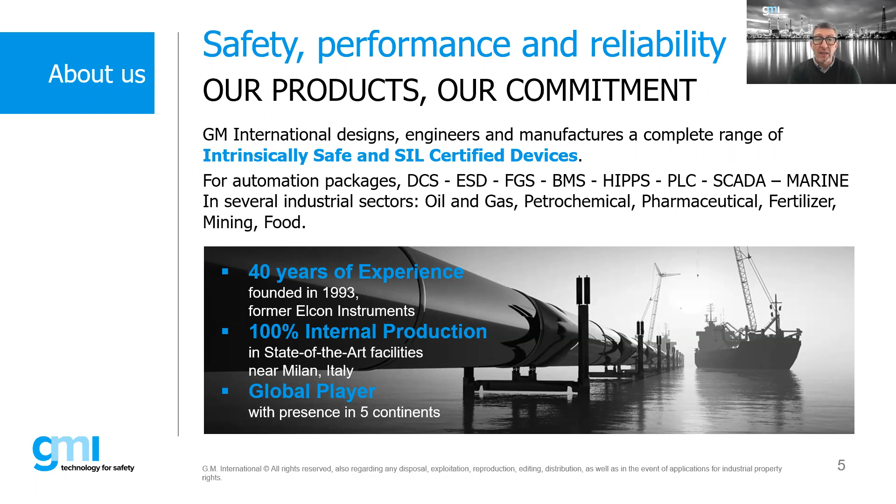We have 40 plus years of experience, and we are very proud to be 100% internally manufacturing our product in our state-of-the-art facility near Milan, Italy. We have a global presence around the globe, around the continent.

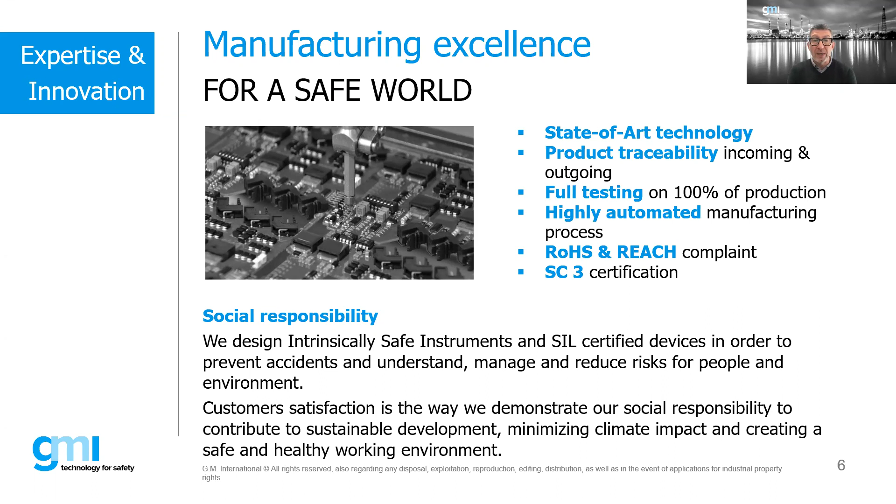Because we make safety products, we take special care in manufacturing them. We use state-of-the-art technology, 100% product traceability and 100% testing. We have a fully automated manufacturing process. We are RoHS REACH compliant, and we are also certified functional safety management up to SC3. So our products carry an SC3 certification, meaning not only the product but the process, manufacturing, and design engineering process are also certified to be compliant up to SC3 level. We do this because we care for our environment, our people, the world we live in. A safer world is a better world for all of us.

Bob, you did not download the latest presentation. I didn't.

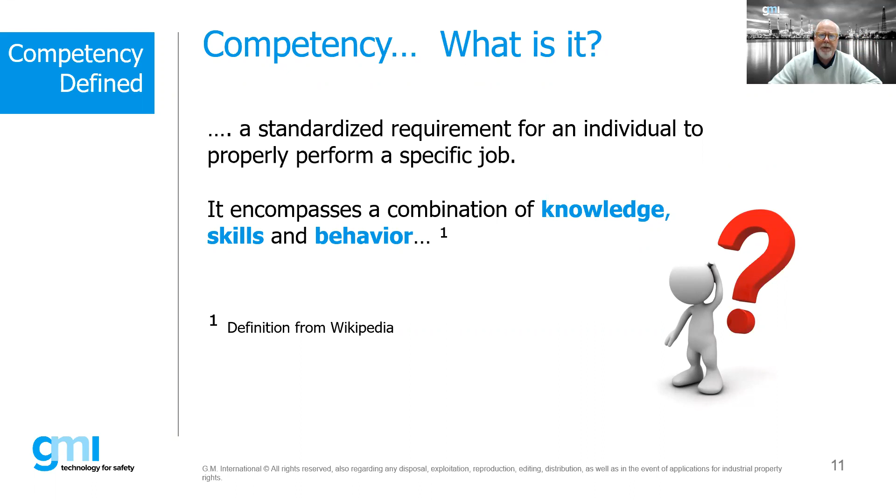Again, competency doesn't mean that you necessarily have a lot of experience, right? That's important to understand. There's a lot of people out there that have been doing things, but they've been doing it wrong for a long period of time. One of my colleagues worked in the offshore market for about 15 years as an electrical installation technician. He went and did a competency program after 15 years of doing installations offshore, and realized that he had been doing a lot of things completely wrong. Even though he thought he was doing it right, and had a lot of experience, he realized very quickly that he didn't know what he was actually doing. So it's important to understand competency is not just experience.

Understanding that competency applies to different roles and responsibilities, just because you're competent in one area doesn't necessarily mean you're competent in another. Look at it like an airline pilot - a pilot that knows how to fly a Cessna doesn't necessarily know how to fly an Airbus, or even within the Airbus family, you have to understand how to fly the different jets. So you have to demonstrate your capability, and then you finally must be assessed in the performance. This is where somebody sits over you and looks at you and says yes, you know what you're doing, or no, you need more work. So competency is basically that knowledge, skills, performance, and behavior.

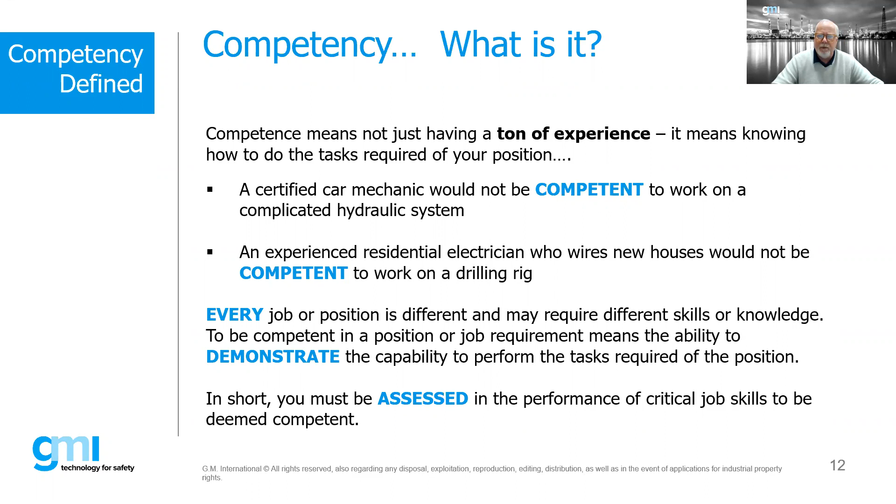So where did competency really come to a head with regards to the EX world? If we go back and look at the history of EX installations, it was really developed - the first competency programs came out of the Piper Alpha explosion that happened in the North Sea in 1988.

Piper Alpha - it was not an electrical issue that actually caused all the problems, but there were a lot of lockout tagout issues, responsibility of management issues, and a lot of things that took place that ultimately caused the disaster. But this was a real wake-up call, not just for the offshore oil industry, but for the industry as a whole. Piper Alpha constituted about 10% of the total North Sea production of oil and gas, and it was a traumatic loss of life - 167 people were killed.

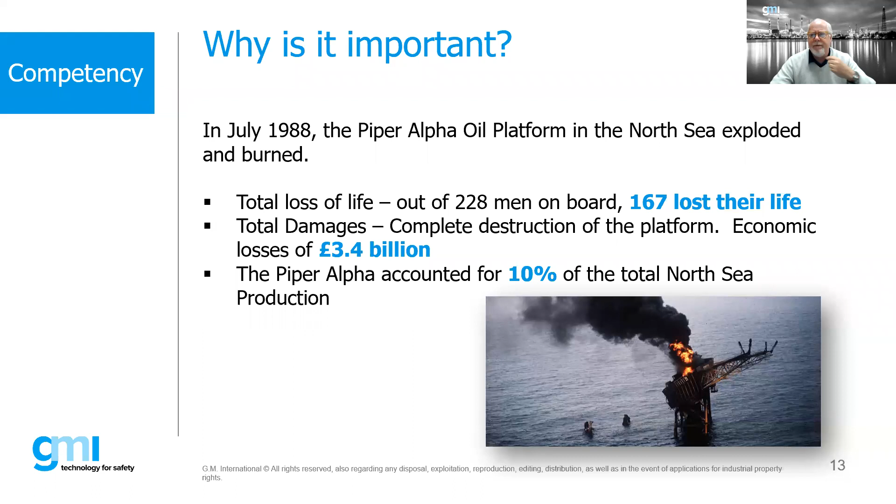So what happened after Piper Alpha? There was an investigation called the Cullen Report, which took about two years to publish, and it finally came out. In that report there were 106 recommendations, and every single one of those recommendations was implemented. One of the key things was that the employer should be responsible for the competency of its employees. This was kind of a vague mandate, if you will.

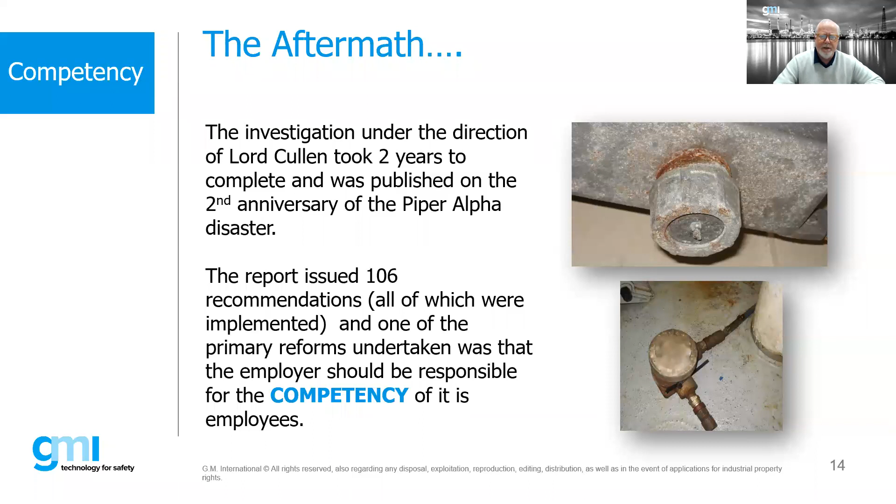But a lot of the owner operators and regulators started looking at it and said, well, how can we determine the competency of employees, specifically for the electrical and instrumentation folks? What really also came out of it were improvements to the permit to work system and the initiation of formal safety assessments. This started to formalize a lot of the things people were taking for granted - we now really have to have systems in place to regulate and stay on top of it.

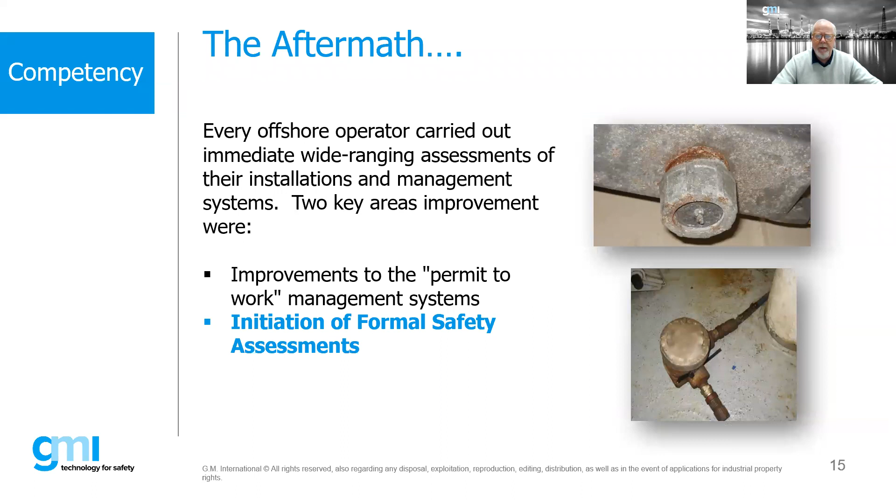So what happened really is the Cullen Report came out, and the other owner operators in the North Sea - companies like Shell, BP, BG, Esso, Chevron - they all got together, all the technical authorities from all the major oil and gas companies.

Basically, they got together and said we need to do a better job. It didn't start off as a governmental mandate, but the original programs were actually developed by the oil and gas operators themselves. They wanted an outside entity to develop a competency program they could put their people through, to make sure these individuals know what they're doing the moment they step on an offshore oil platform. So the first program developed was CompEx, introduced in 1994 at Aberdeen College.

Fast forward to today, within Europe we now have the ATEX 153 directive. Many of you are probably familiar with ATEX. The ATEX 153 directive basically puts the onus on the owner operator of the facility to make sure individuals participating in electrical and instrumentation work, in all different kinds of roles, must be competent in some way, shape, or form. This got implemented in the UK as the DSEAR regulations. So in a roundabout way, the original competency programs came from what was more of a client-specific requirement, and it became more of a regulatory requirement under the UK DSEAR regulations.

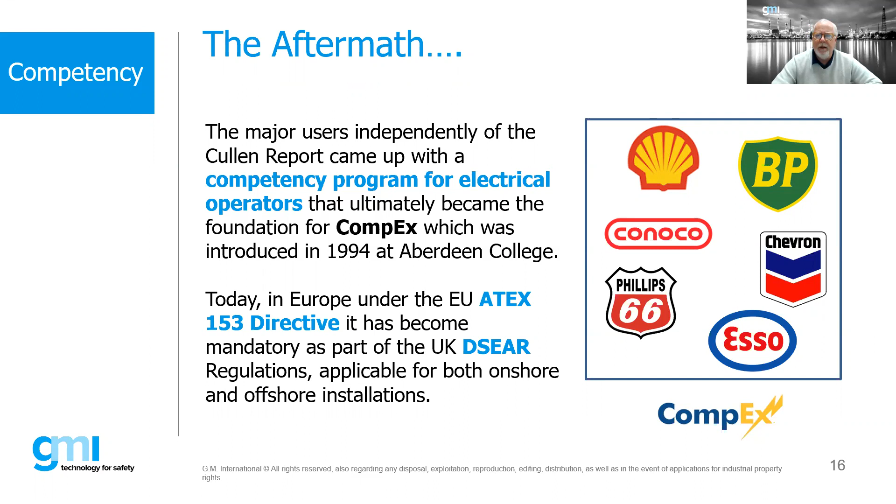Now, what standards are out there that really define competency? Where do we find the information, and how do we determine what makes an individual competent? The main installation standard that we use, and that most competency programs are based upon, is the 60079-14 standard. This is our design standard that we follow for EX designs.

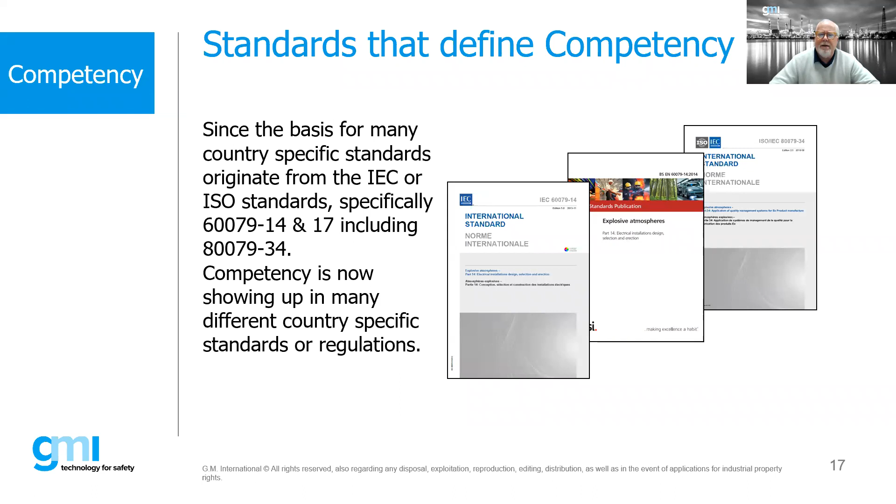There are other IEC standards out there. The 61892 standards deal specifically with offshore oil platforms, and there's a whole bunch of other IEC standards obviously. But the one we really follow with regards to competency is the 14 and the -17 standard, which is our inspection standard. And now the latest edition, 80079-34, applies to manufacturers of EX equipment. So if I'm a manufacturer of EX equipment, this second edition, published about 1.5 years ago, now requires competency for manufacturers. It's showing up in a lot of these standards, and it's important to understand why.

Just because a standard gets written doesn't necessarily mean it becomes a regulatory requirement, right? Standards are standards, and it's really up to the role of the regulators to determine how they're going to apply it. In the UK, the organization responsible for health and safety is the Health and Safety Executive. They're the guys that will come in and shut down a facility if you're doing things wrong. In the United States, we have organizations like OSHA, the US Coast Guard, BSEE, and different regulatory agencies throughout the world that, in some respects, adopt these standards and say you must comply with them.

Competency comes into effect starting at the standards, but it also comes from clients insisting on it, and now regulators are getting involved too. This actually just happened here in the United States, published in July of this year. This is the first time the US is starting to require competency. The United States has actually been a little behind the ball with regards to some of these requirements. In many other parts of the world, competency has already been in place, and the regulators have bought into this. But now finally the United States is starting to require this as well.

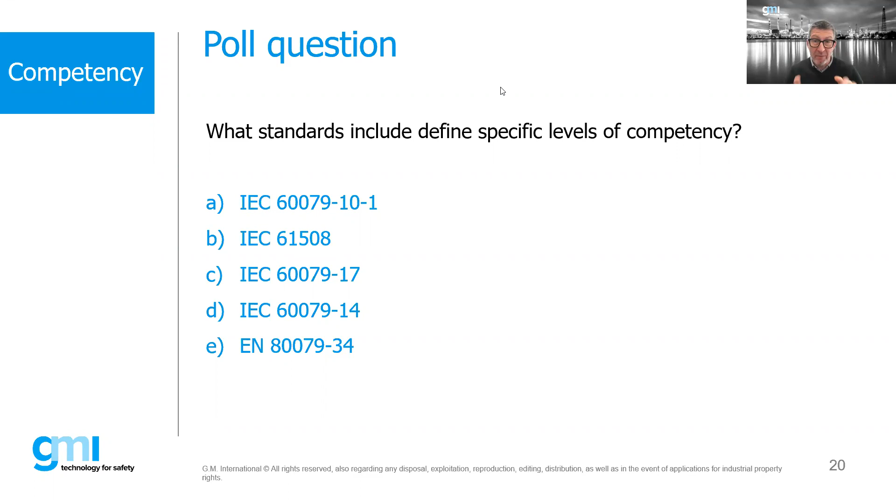We had our own version here in the United States, as everybody is aware of Piper Alpha, with the Deepwater Horizon. Obviously there wasn't quite the loss of life that we had with Piper Alpha, but we certainly had 11 people die. But if you notice, the economic impact of this was about $45 billion, and it affected BP and Transocean in a very dramatic way financially, and it affected all the fishermen, the people in the industry, the tourism industry, and everybody else. It was a horrible, horrible accident that took place.

But this was, I think, another wake-up call for the industry, and it started making people think again, what are we doing, how are we doing things? Everybody knows the story about Deepwater Horizon, so I won't go into all the details, but basically it wasn't necessarily an electrical issue that was really the key deciding factor. It had to deal with the BOP and the well and all that other good stuff.

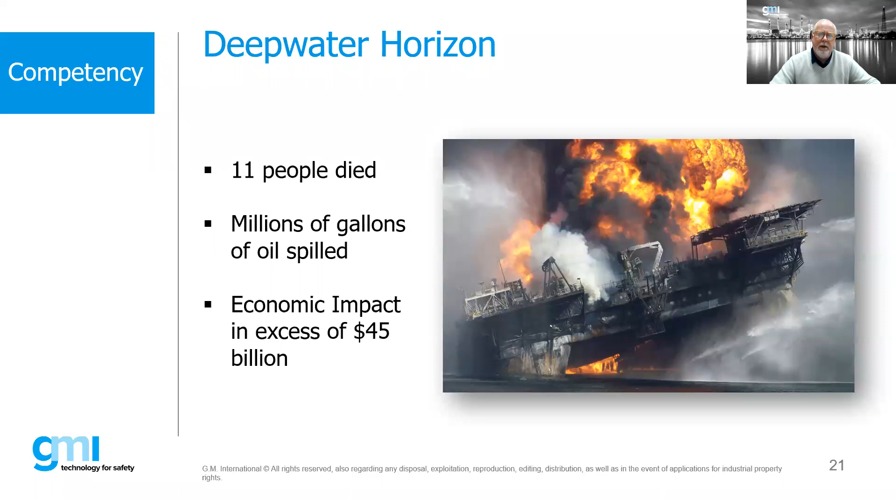But there was a report published, the United States Coast Guard BSEE report on findings on the Deepwater Horizon. One of the things that came out of this report was that some equipment on board was in bad condition and severely corroded, and some of that equipment had been left in hazardous areas. If you've seen the movie, or are familiar with Deepwater Horizon, what was the actual source of ignition? In the movie, they talked about intake of gases into the motors, the motors oversped, the lights started getting brighter, and then ultimately that was the source of ignition.

Well, that was one theory. There were other theories that actually there was a door left open for electrical equipment that should have been purged and pressurized, but was not, and that potentially could have been the source of ignition. There were also theories that the electrical equipment on the driller's floor, located in the Zone 1 area, could have caused the explosion. So nobody actually truly came up with the final determination of what caused the initial explosion. It could have been, again, many different sources.

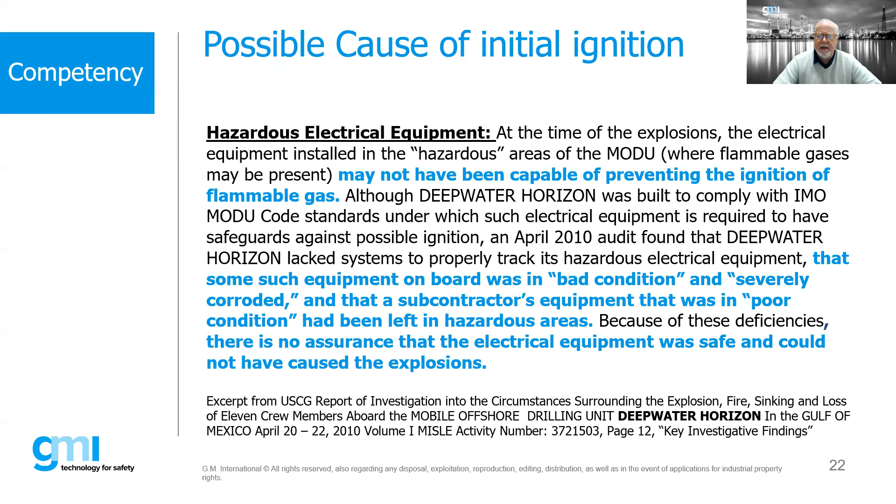But obviously that also changed the thought process with a lot of oil and gas companies, starting to realize, hey, we do not want to have this happen to us. So the important thing is the certification of a product in and of itself is not the whole picture.

So it's not just the product certification, it's the proper selection, the installation practices, and certainly maintenance is a key issue. We just can't install this equipment and let it go indefinitely without taking a look at it, making sure that it is still suitable. It's like driving your car. You don't drive it forever without changing the oil, changing the brake pads, doing all that stuff. We have to maintain this equipment.

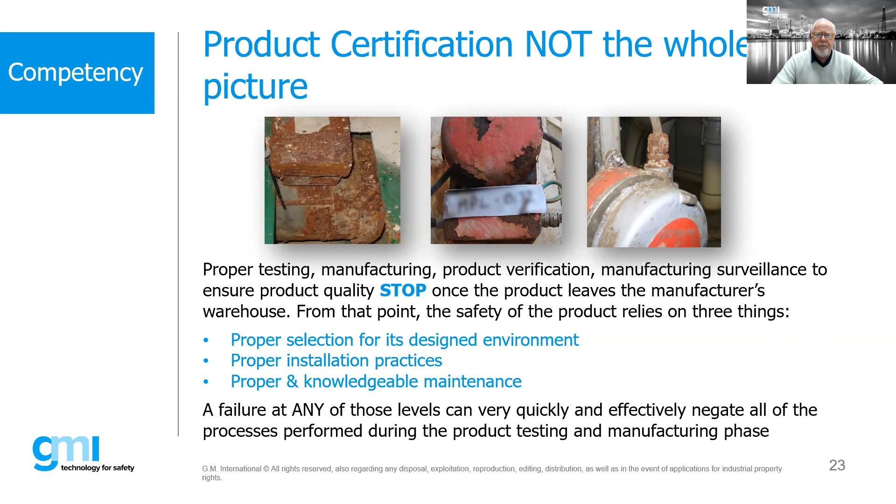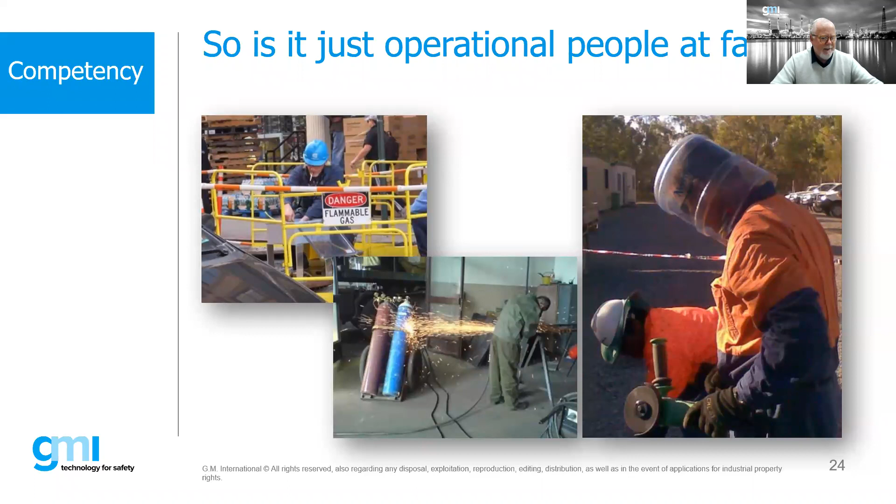So a lot of engineers, and I'm sure we have a lot of engineers paying attention here, we always think well, it's just those operational guys, right? It's not necessarily the guys in the buildings doing the design work, it's the idiots in the field, so to speak, right? Well, it's not just necessarily the operational people. It's actually kind of a combination of a lot of different roles and responsibilities.

So this was a great report that was done quite a few years ago by the HSE, and they looked at the root causes of a lot of major industrial accidents. One of the biggest areas in which the root cause came from was actually at the specification stage. Now, what does that mean? The specification could be the fact that maybe some engineer designed a product that was not suitable, or maybe the design itself, not necessarily the product, but the design itself was faulty. It could have been a lot of things.

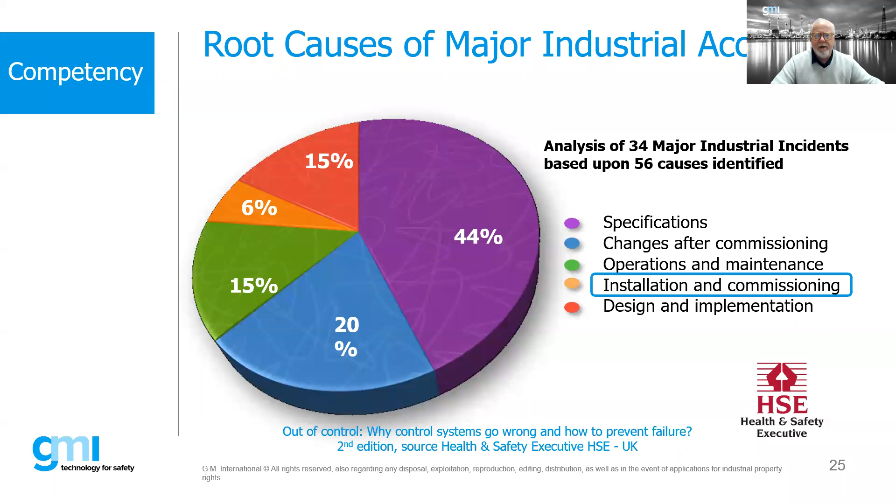And we look at it and we say, well, it's the guys that are actually maintaining it, and again that's a healthy chunk, but it's only about 15%. So a lot of things that have come about from some of this research is showing that a lot of the faults and problems we run into are actually developed at the very, very early stages. So it's important in this whole thought process that we don't just look at it from a maintenance and installation issue, but we look at it from a design standpoint as well.

So generally, last week I had an opportunity to do an inspection on a vessel that was powered by LNG. They called us in to do an inspection on this, and we finished it up. Of the 400 items that we saw installed, in their case there was about 80 issues. Now some of these, quite frankly, were not that big of an issue, but that's a pretty healthy percent. In general, when you come in and start doing inspections on EX installations, the ratio of issues you might find is anywhere from 20 to 45%. It's not uncommon to find a lot of problems.

And if we look at the example on the right-hand side with this gas detection panel, that was a panel installed in a Zone 2 area, but clearly states that it is a non-hazardous panel. So that's not necessarily an issue for the guy that was actually doing the installation. It was more of an issue that never should have been there in the first place, right? And again, lack of training, lack of competency.

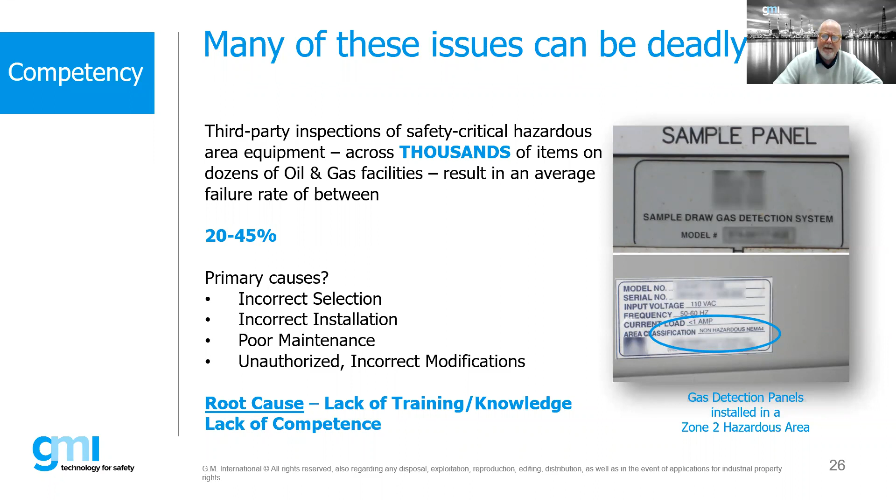We have a new question for you guys. We showed a chart moments ago showing what is the leading root cause of industrial accidents, and see if you remember that, or if you know what it is. Say ops and maintenance, or specification, installation, change after commissioning, which are called modifications, and design and implementation. They are all causes of accidents, every single one of them, but one is a leading cause, which, when I learned that, I was a little stunned. I mean, we always blame it on those guys in the field, but it's not always.

Yeah, and on the other end, you know, the pictures you show about maintenance, crazy. After 2.5 years, the motor is completely rusted and rotted. Of course, if it's an EX-D motor, it's no longer suitable. So it's obvious an accident happened.

Okay, well, let me see if anyone else is answering, or we'll land a poll. We have a good percentage of you guys answering.

Most of you said specifications. Yes, she's correct, fantastic. Specifications was the correct answer. And again, as Paulo said, it's a bunch of different things, and they're all potential causes, but specification seems to be the root cause of a lot of these industrial accidents.

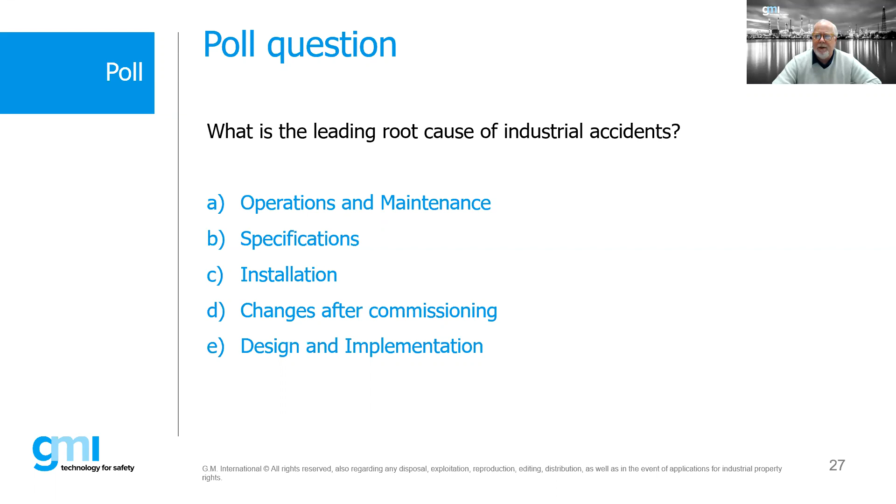So let's continue on. Now let's get into the nitty gritty. What do the standards actually say? So again, the design standard, the -14 standard, the latest version is 2013, and it's divided into 3 roles of individuals. This is all located in Annex A of the standard.

So it divides it up into knowledge and skills of a responsible person. This could be a project manager, a project engineer, or it could be an operator technician, which are the individuals actually doing the installation and maintenance. And then finally, the designers—these are the folks that are actually selecting products, designing systems, and all that.

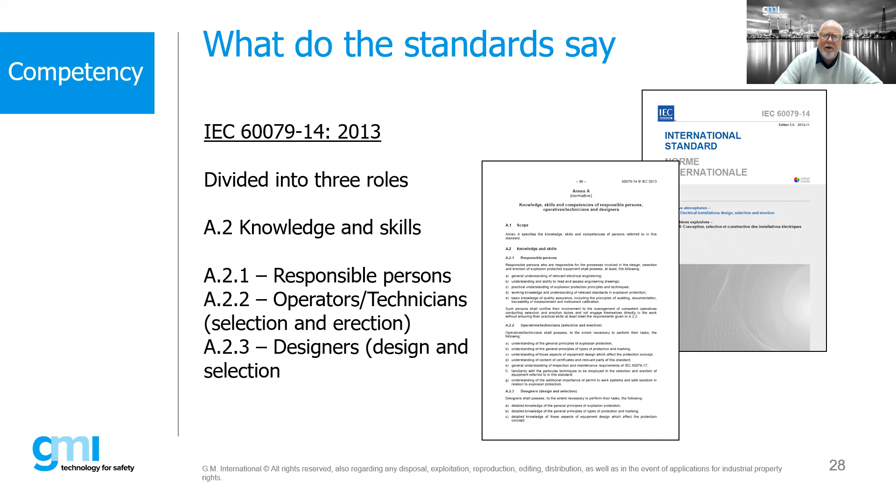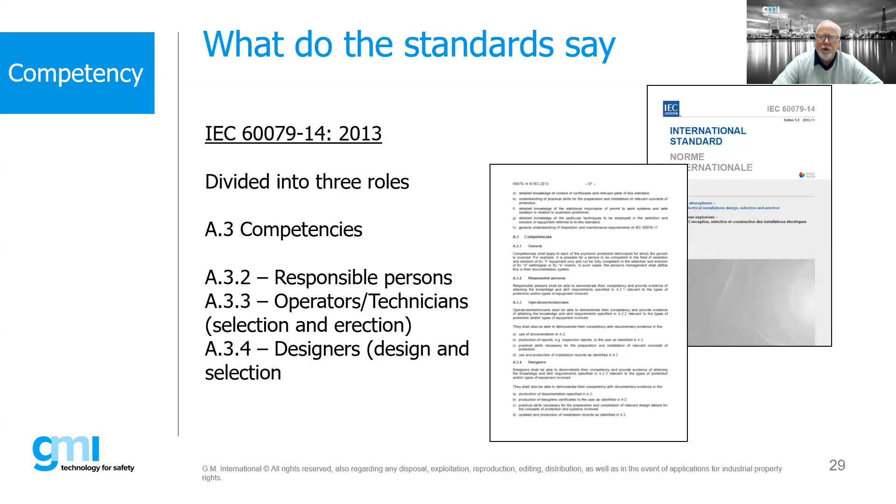So within the standard, it starts defining the competency for those 3 individuals or groups of individuals, and it starts to tell you specific information as to what that individual shall understand, should know.

So the final thing, it states about an assessment, and the competency shall be verified and attributed at intervals relevant to national regulations, on the basis of sufficient evidence that the person has the skill. Can they act competently—there's our behavior—and do they have the relevant knowledge and understanding? So just because you have that knowledge and understanding, the standard is actually saying you shall be assessed. Now, here's the important thing to understand about assessments.

Assessment doesn't necessarily mean, and the standard doesn't say, that it has to be done by a third party. A lot of organizations use outside training and assessment programs like CompEx or the IECEx COPC program, which we'll talk about, but it doesn't necessarily say it must be done that fashion. It can be done internally, but everybody going through it should at least go through this, and a new employee, just like orientation for doing your job, should be trained and assessed.

So a little bit about intrinsic safety. There is what is called the 60079-25 standard, and that's for an IS system. Part of the requirements within the -25 standard is there's a requirement to make what is called a descriptive system document. A DSD, for any of you who have done IS circuits, is something that is a requirement.

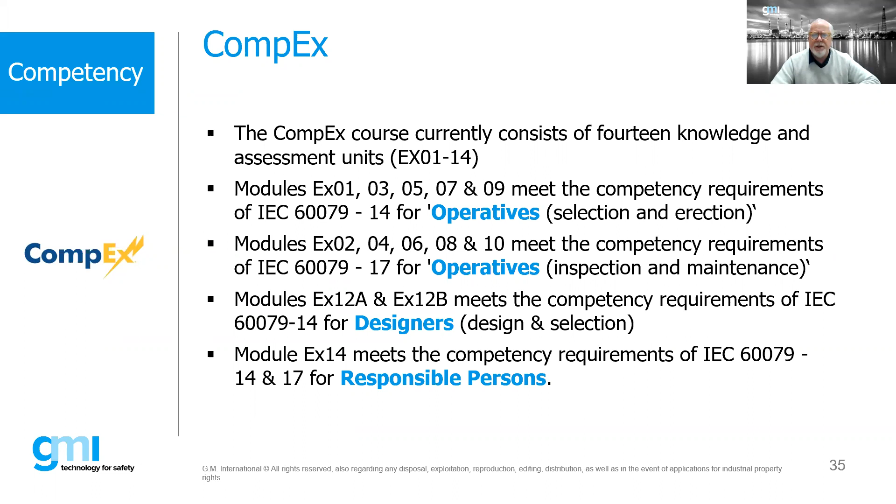So I wanted to let you know a little bit about how these break down. Under CompEx, you have modules 01, 03, 05, 07, and these are for the operatives for selection and erection. The modules 02, 4, 6, 8, 10 are again for operatives. You have different modules for designers, and then you actually have a course specifically for responsible persons. The most common is the 01 through 4 program.

It's about 4.5 to 5 days, depending on the center. Basically, it's about 2.5 days of classroom work and about 2 days of practical assessment, where you're doing hands-on installation and inspection. There's also what is called the CompEx 12 course, which is a design course, which is all classroom, and it's generally about a 5-day course.

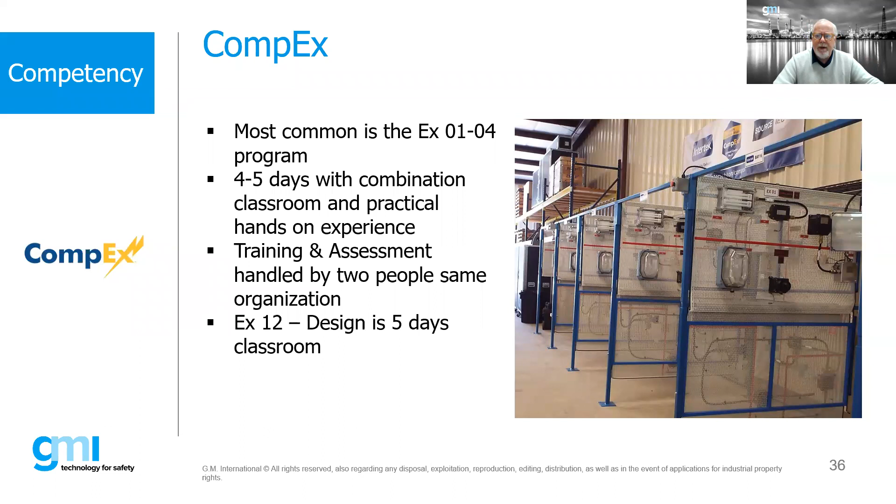The one thing about CompEx, which I think is a good thing, is there's a very much consistency amongst all of the centers that are set up around the world. So if you take CompEx from one place, it's basically going to be very, very similar. Not necessarily the training material, but the assessments and inspections and installations are going to be very, very similar because JTL provides the guidelines as to how these candidates shall be assessed. So it's a very consistent program worldwide.

Now the IECEx has come up with their program, and it's called the Certificate of Personnel Competency. They've broken it down into these various modules. The main one is the 001, which is basically a fundamentals course. The 009 is the designer course. And the IECEx has basically made it somewhat of a modular type thing to where you can kind of pick and choose which modules really make more sense for you.

Where CompEx is a little bit more, we take these sets of modules as one class, the IECEx says we do these different ones and do it in a way that makes more sense for you.

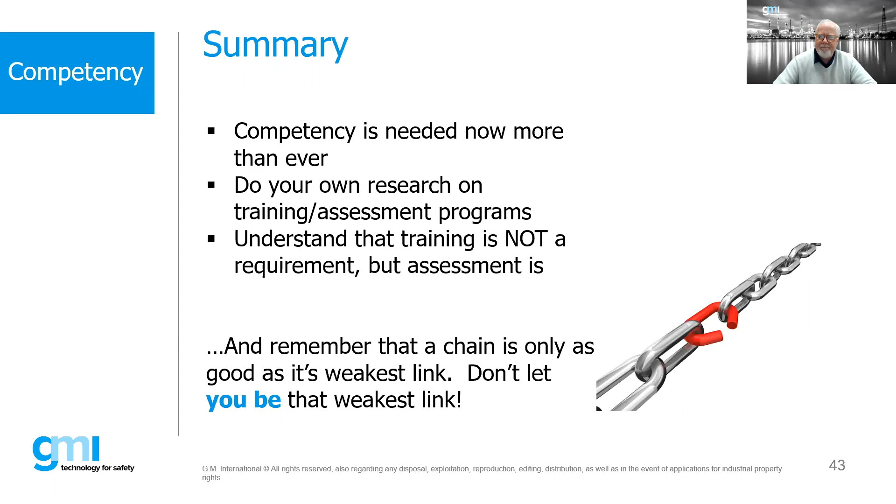Great, Bob. You know, given you are an instructor of both schemes, there is no excuse for anybody not to be trained and assessed, if we want to do our job right.

And it's like, listening to you, I was thinking, you know, I can drive, I was able to drive my car when I was 16. In Italy, legally it's 18. But I didn't have a driving license, you know, it's not legal to. So, you know, getting a certificate, an assessment, is like a driver's license. You know how to do it, but somebody proves that you really know how to do it.

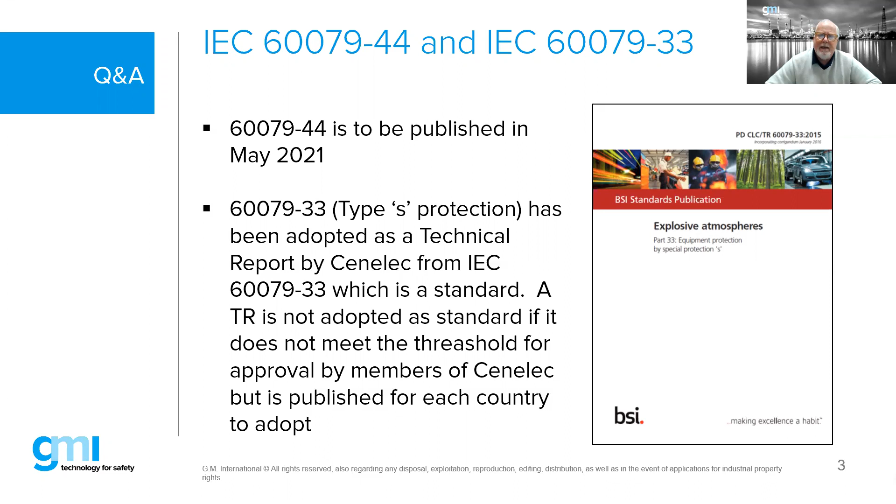The next question, which you already answered, was which would be easier of the two, Compex or IECEx, but we did answer that. Let's see this new question: we build products to IEC 60079-34, and I've been told we need competency by our certification agency.

Well, the option, I think we have clearly discussed this in our webinar, right, Bob? Yeah, and so this is again for the manufacturers. And if you think about what the Compex programs and the CoPC programs, they were more around the

60079-14 for the roles of a responsible person, a designer, and an operator technician. Well, as a manufacturer, you now have procurement, assembly people, different roles, salespeople - different people in different roles that are not necessarily defined within the -14. And therefore, the training programs, the modules, either in Compex or in the IECEx CoPC program, are not necessarily geared right now to address this.

So what I recommend to people is that either contract out to another organization. We do this where we actually have a training program specifically for manufacturers, or do it in-house. Basically look at the standard, find out what is it in the standard that you really need to have, and do your own in-house training and assess your individuals and put that all together. So there's ways to kind of address it. And if somebody is interested in that, just have them give me a shout.

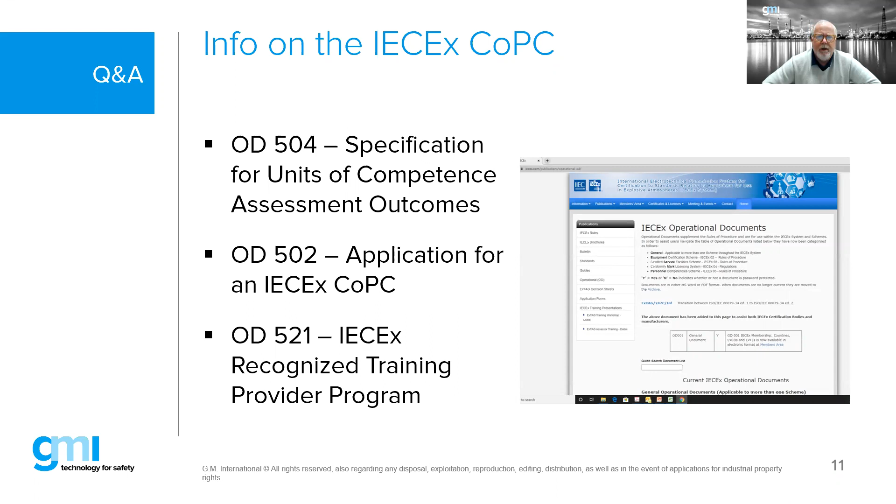Okay, I think under Compex, we have this. Yep, there's a website of Compex - compex.org.uk. So you can go to that website and it'll give you information as far as the centers. The way you register for all of these, either Compex or the IECEx, is under Compex - they don't do the registration directly through them. They give you the contact information for the centers in your area. So you would reach out to a center and say, hey, I want to find out more about Compex.

Under the IECEx, the best bet is to go to either the Recognized Training Providers page or to the IECEx certification body page that offer the COPC, and reach out to those folks, and they can provide you more information as to what they actually offer. Or certainly you can reach out to me and Paulo.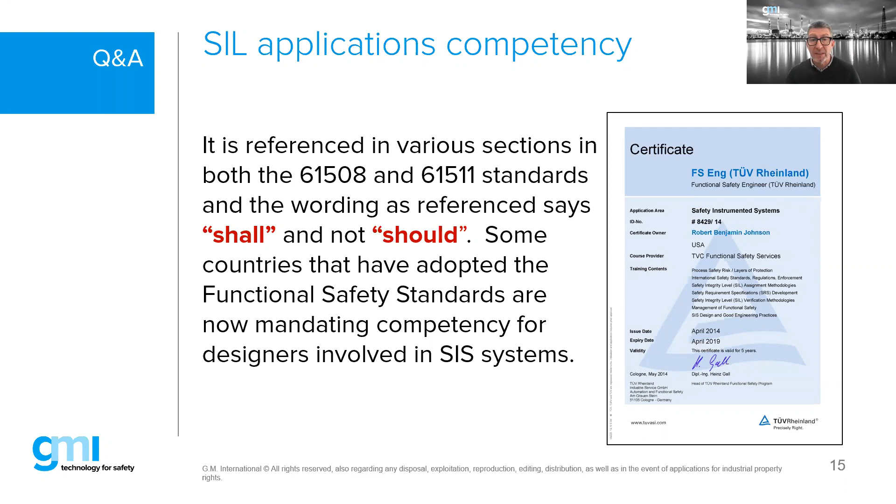And so now many countries have now said, well, look, if you're going to be doing functional safety design, you need to show that you're competent. And so the TUV Rhineland course, certainly the functional safety TUV Rhineland course, is a fantastic course. I took it quite some time ago, and it's fantastic. There are several courses, but it has become a challenge. As for the manufacturer and the engineering firm and everybody involved, you have to also have a functional safety management in place. It's a mandatory requirement now.